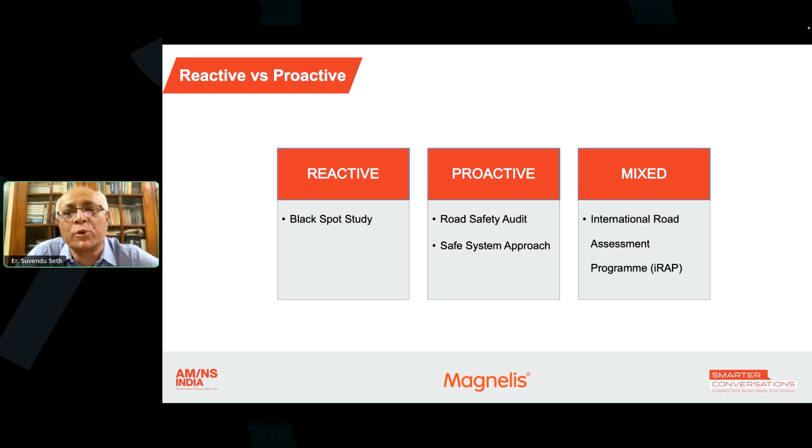What is a proactive approach? Proactive approach is the road safety audit, among these three, because black spot study is based on data collection, I'll go into details of it right now, and IRAP is a mixed approach. So the answer is road safety audit. These three I'm going to talk about right now.

The steps to crash analysis are: first identify where the crashes occur, then quantify the crashes, how many crashes occurred, what are the sources of the problem, why it occurred, evaluate the various improvements so that crashes can be reduced, obtain expert opinion on how to do the improvement, and then get funding to implement the safety measures. This is a very important step, because unless we implement the solutions, the situation will not improve. Even if we have done the study, we'll just keep the report on the shelf, nothing will happen on the ground. So this sixth step is very important.

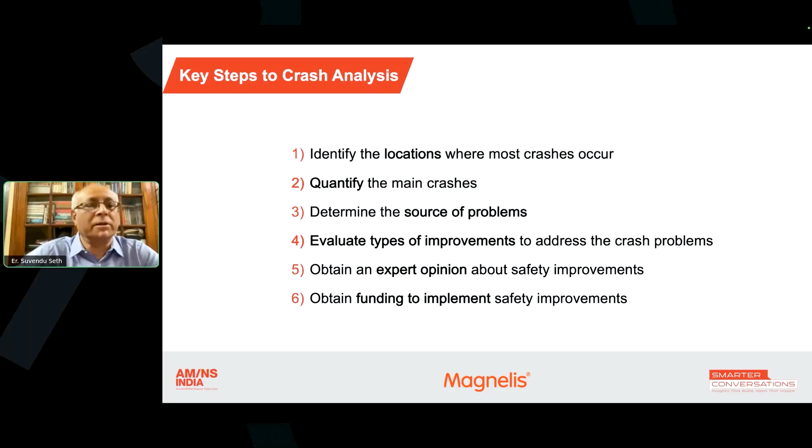This is one of the tools used by road engineers, the collision condition diagram. On the left side is a mid-block section where we've shown all the crashes, different terminologies like rear end crashes, left turn crashes and so on, shown pictorially where they occurred. The right side diagram is at a junction, showing what type of crashes occurred, side swipe or rear end and so on. We also mark the date and time, so that by looking at this figure, one can understand what exactly happened in that area, where the crashes happened, at what time, and what type. It gives a very good pictorial representation.

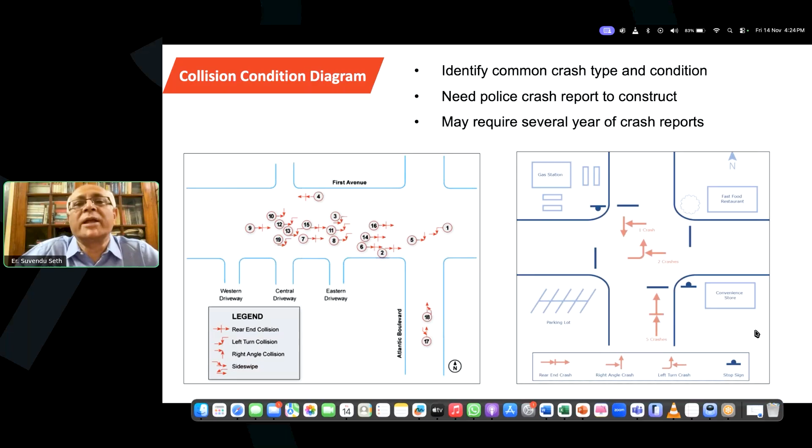Then we look at the causes of road crashes. The major causes are road users, vehicles, road conditions, roadway design, environmental factors, or any other causes.

Road user causes include excessive or rash driving, high speed, violation of traffic rules, fatigue, alcohol, or sleep. These are the major road user causes.

Vehicle causes could be failure of brakes, steering system, lighting system, and so on.

Road conditions we are also aware of: skidding roads or potholes, vehicles trying to avoid potholes and therefore having a crash with another vehicle.

Roadway design problems could be that the sight distance was not enough, or the curve was too sharp for that design speed, or traffic control devices were not proper, or there was no lighting provided. These are all the road design aspects.

Environmental factors include heavy rainfall causing poor visibility, or snow, mist, or smoke. This normally relates to visibility getting reduced and driving conditions becoming unsafe.

Other causes could be various factors. The two examples I've given here are improper location of advertisement boards, often seen on Indian roads. At an important junction, in a critical position, there's a big hoarding, so vehicles driving on the main road cannot see that some other vehicle is entering from the minor road until the last moment, and there could be a crash.

So this is some cause. Or it could be that the level crossing gate at the railway was coming down very slowly, and the vehicle entered the railway lines, and then there was a crash. So these are some other causes, but primarily it's roadway users, vehicles, conditions of road design, and environmental factors.

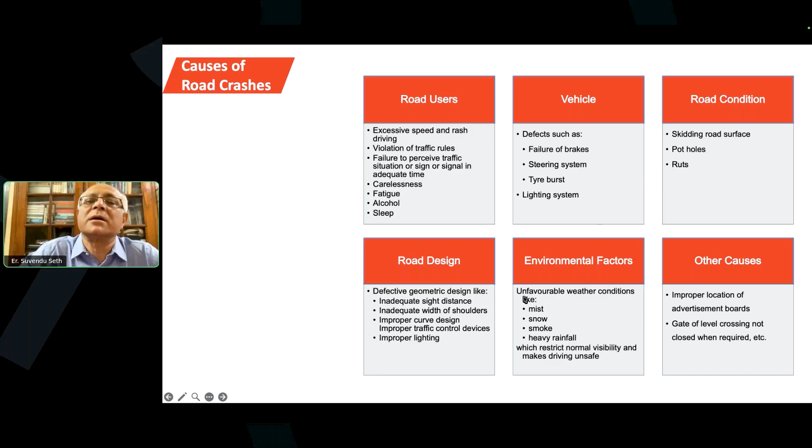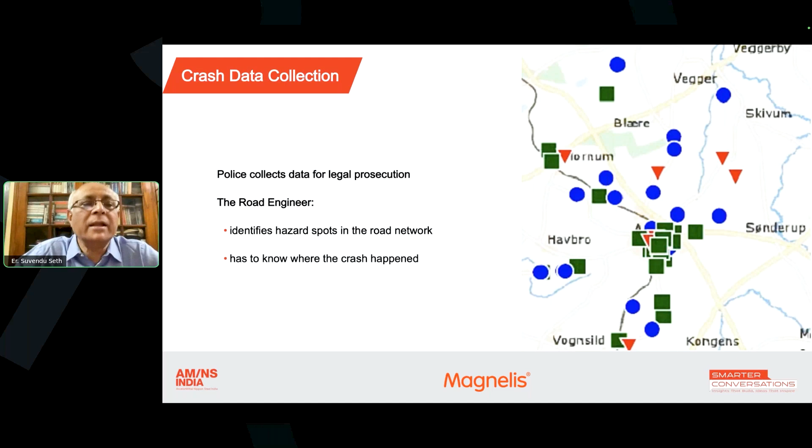So these are the major causes of crashes. Crash data collection: the first thing that a road engineer does is identify where the hazards are, which places the crashes are happening. This is usually from the police records. Police keeps the record of crashes, and the road engineer has to collect this and put it on the map to see these clusters, which areas are hazard locations, and then find out what exactly is happening, why the crashes are happening. So there...

There are various types of data that have to be collected. The very basic thing, the first is general data, like what time did it happen, which day did it happen. Time and date are important because a crash can happen in the evening or in the morning because of certain lighting conditions or certain environmental conditions.

So it is important to find out, when we are trying to investigate why a crash happened, what time it happened and then the date, because from date we can understand if it's a working day or a holiday. Then the nature of travel is different, so that can tell us why a crash happened.

There's some important information like the personal information of the driver - male or female, young or old. These can give an indication of driving nature. Classification of crashes: crashes can be either fatal, serious injury, minor injury, or it could be just plain simple property damage. So these are the first type of information that one collects.

Then the location. Location is very important - where exactly did it happen on the road, the exact chainage. Normally this has been our weak point, because the police records usually do not give an exact location. They give 50 meters from this particular landmark, or 70 meters from there. This doesn't exactly tell you where the location of the crash was. If we do not know it, investigation becomes very difficult.

Nowadays, with the present system of recording, where the police are doing it with handheld GPS, they're getting the exact location. Therefore it's much easier to plot it on the map and see exactly where the crash occurred, and we can get the cluster and do a better analysis. If we do not have a good idea of the location, the analysis is not right.

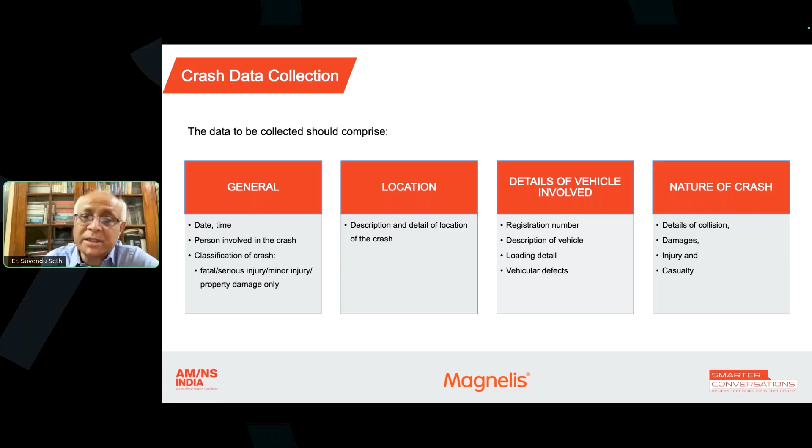Then we also need to have the vehicle involved - what registration number. This is more important for the police, but the type of vehicle is important, because whether it was a heavy vehicle versus a light vehicle versus a two-wheeler is important for engineering analysis, and whether it had any vehicle defects or not. Then the nature of crash - detail of the collision, what kind of damage happened, were people injured, how many casualties. These are all part of crash data collection and subsequent analysis.

Now we're coming to the black spot. A black spot is a spot where a number of crashes happen, a cluster of crashes. There are various ways of finding out which one is a black spot. In India, we follow the MORTH protocol, which was formulated under Supreme Court guidelines: any spot where 5 or more accidents happened in the last 3 years can be called a black spot, or any spot where 10 or more deaths happened in the last 3 years, or a combination of both. So this is defined, and that's how we look at identification of black spots.

Once we get the data, we look at the locations. By location, I don't mean just one spot - it could be one region, 500 meters this side or that side. That's how a spot is dealt with. And then we have to go and do the investigation of the black spot. To treat crash analysis, the process is like this.

First of all, decide the criteria of listing crash locations. This is our protocol in India for finding out how many crashes happened over the last 3 years at which spot, using the 5 and 10 rule: 10 deaths or 5 crashes. Then list all the crashes.

Then the team has to go out to do the investigation at the site, obtain all the relevant information from the police, go to the site, see what exactly is the situation there. Be a detective, find out what could be the possible cause of the crash, and then find out solutions, what could be the countermeasures to avoid this again.

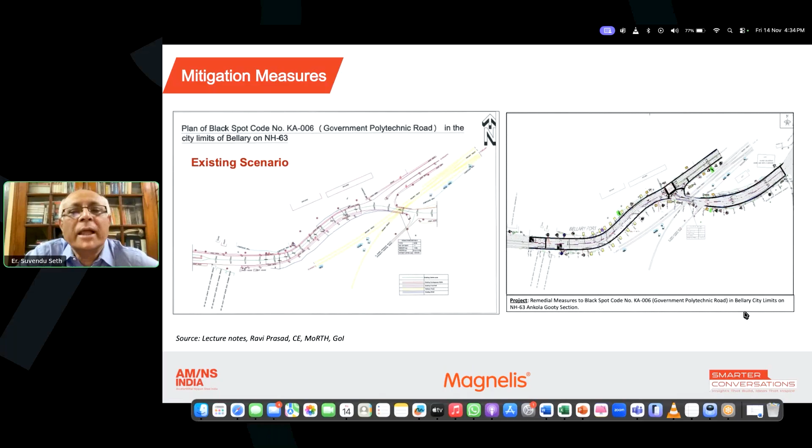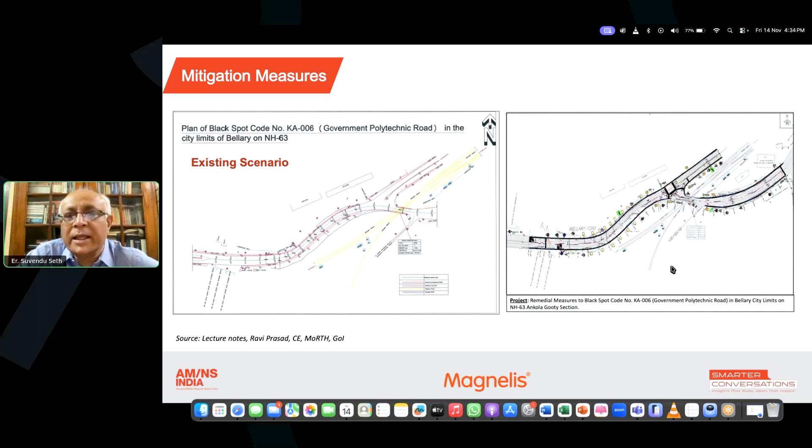But before that, let me talk about the mitigation measures and how to handle it after the crash investigation and analysis. On the left-hand side, this is an existing situation, a road with a Y junction, where several crashes occurred. So it was identified. On the right, you can see improvements made to this Y junction, and I'll go into much more detail here in the next slide.

See, this Y junction has been improved. There have been several signs put up for guiding the drivers, pedestrian crossings have been put up, islands have been created, and several types of markings and signs put up. This is to guide the traveling public better - by traveling public I mean all the road users: the people driving, two-wheelers, pedestrians, or cyclists, for everybody. So these are the signing, marking, and safety features put up to reduce the number of crashes at this junction, because there were a lot of crashes happening.

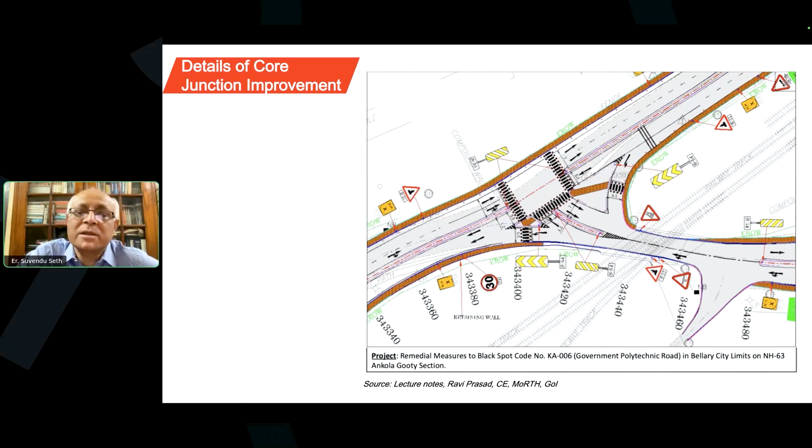Okay, so this is one example of junction improvement which comes out of black spot analysis, the one spot improvement. Well, here I have to talk about the relevance of crash barriers. Crash barriers are important because they can reduce crashes, especially when there's a high embankment right next to the side of the road, and if there is a narrow shoulder, vehicles can run off and fall down.

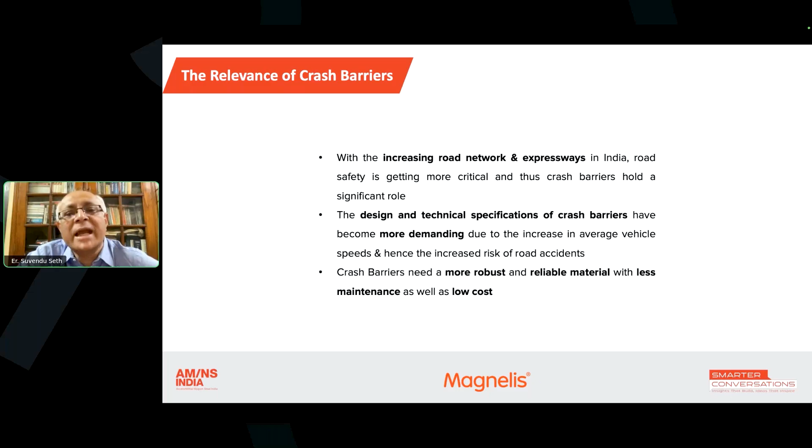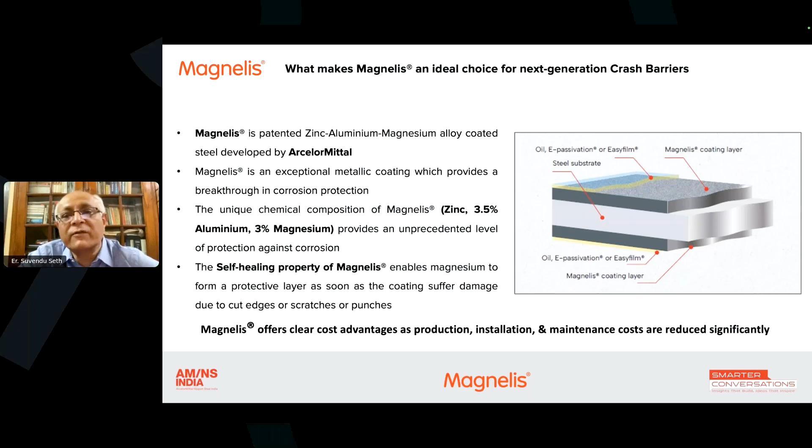Crash barriers can be of various types: rigid, flexible, or semi-flexible. Usually we use steel crash barriers, which can direct the vehicles back to the main road. There are several types of crash barriers, and various modern technologies are available in producing them. Magnelis is one such product which uses zinc, aluminum, and magnesium, giving better long-lasting life and reducing the cost of overall installation and maintenance. So this is one of the important products of crash barriers, an important safety product.

Going over to the next aspect, which is road safety audit. Now, as I said, road safety audit is a proactive method. It's a formal process.

It is not an ad hoc process. It's a formal process of auditing the road. It finds out the possible chances of accidents occurring and where they can occur. This road safety audit can be done for various stages of roads. It can be for operating roads where existing traffic is flowing, or for future roads which are under planning and implementation. It could be for traffic related projects or various road users.

Now, a very important point is road safety audit is an important input into the design, but it is not a part of the actual design. It focuses primarily on the physical elements of the road and tries to find out how to minimize the number of crashes from happening.

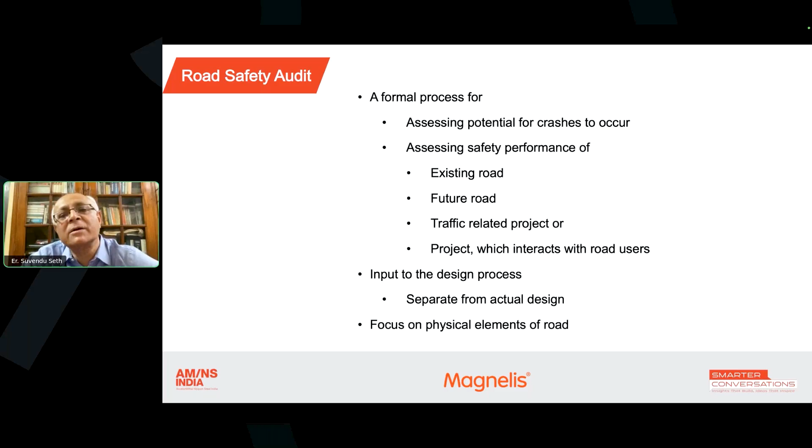So I'll go into more details of it. The aims of road safety audit are to minimize the risk of crashes happening, and even if crashes happen, the severity should be minimized. First we try to avoid the crashes, if not possible, at least minimize and reduce the severity. And this is for all road users, not just vehicles, for all kinds of road users. It also reduces the long-term cost of schemes, because if we can do it from the beginning, the later actions of crash investigation and modifications will be avoided, and it also improves awareness of safe design principles.

These are the aims of road safety audit. Briefly into the details of it.

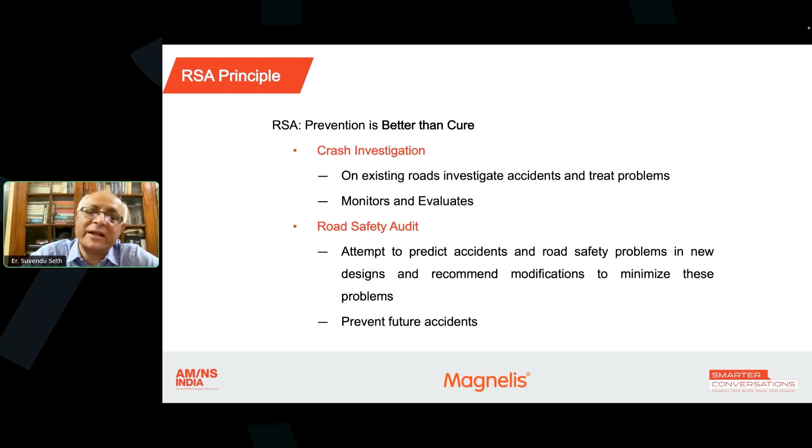The difference between crash investigation, which I talked about earlier, and road safety audit: the idea is prevention is better than cure. In crash investigation, we look at crashes that have already happened, try to find out why they happened, and find measures to prevent it. But in road safety audit, we are not doing that. We are looking at the road, traveling the road, and finding out what could be the possible flaws, trying to prevent accidents from happening at all. So that is the basic difference.

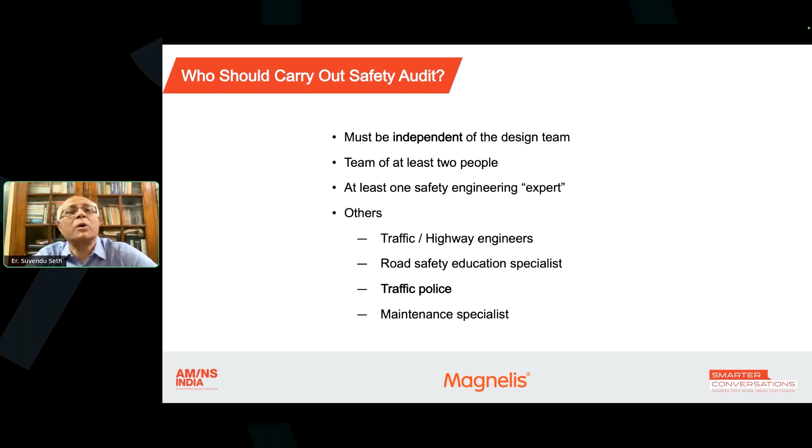So this is how the road safety audit gets done. It can be done for various stages, starting right from feasibility and all the way to existing roads. At the feasibility stage, we audit the proposals and road projects that are going to be coming up. Preliminary engineering, when we do the engineering, an audit can be done.

In the detail engineering stage, it can be done. Then during construction, at various stages, an audit can be done. And then just before opening the road to the public, a pre-opening stage audit can be done to see that the road is in proper shape to be opened to the public. Then after the road is in operation, as an existing road, audits can be done. Obviously the focus of audit will be different — at feasibility study it will differ from detail engineering study or the existing road stage.

So that is the detail of how to do audit. I'm not going into the detail of it, just giving an overall idea of what road safety audit is and how it gets done. Requirement of auditors: they have to have certain skills, at least 2 in a team, preferably 3 to 4 people as the audit team. The team leader should be skilled with sufficient experience and training. The team members assist the team leader, and carrying out site inspection is very, very important.

You cannot have an audit done without site inspection, both during the day and during the night, because any road can look safe in the day, but the situation changes completely at night. The result of the audit is a formal written report, which is submitted, identifying all the flaws with pictures and saying why it is a safety hazard. That's how the report is prepared.

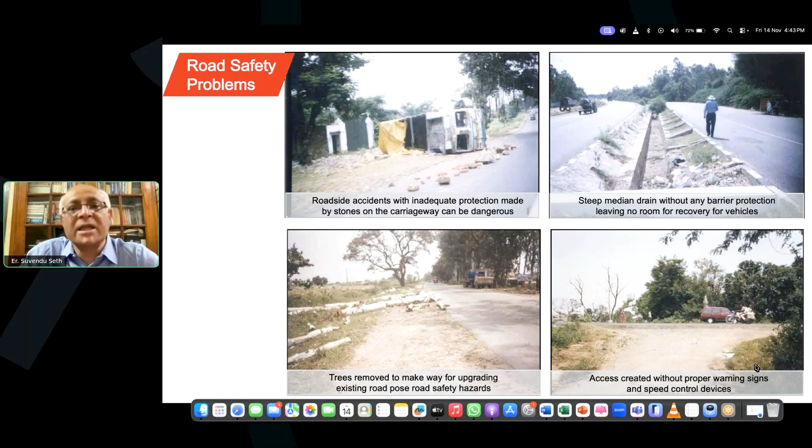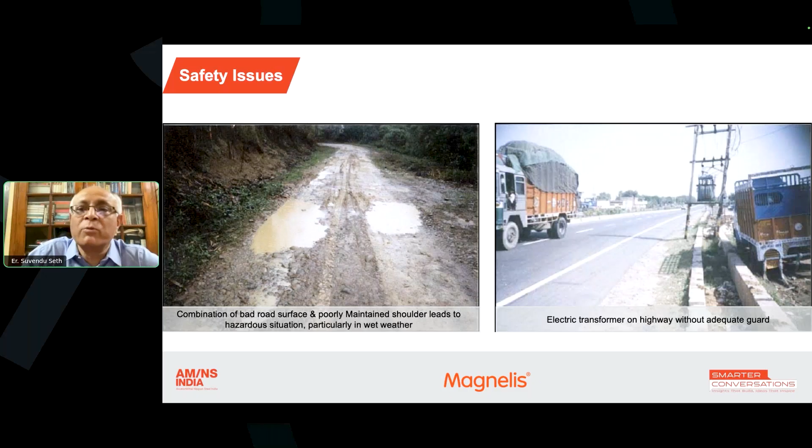On the right side, we have a picture of this transformer put right in the middle of the median. This is a hazard. Vehicles can come and hit the transformer, and there will be serious consequences - there could be fire, electric shocks, and several people may get injured. This should have been caught right at the beginning when the plans were being prepared, because transformers cannot be in the middle of the road. That is the necessity of having audits. These can be caught beforehand, because after that, if you want to remove this transformer, it will be a very expensive proposition. So I'll go into the safe system approach now.

Safe system approach is also not a reactive approach, it's a proactive approach. It is an effective way to address and mitigate risks inherent in a transportation system. We'll go into more of a systems approach here. It works by building and reinforcing multiple layers of protection. The whole idea is if you have multiple layers of protection, even if one fails, there will be another level of protection, so you will be safe. It's a very holistic and comprehensive approach to safety.

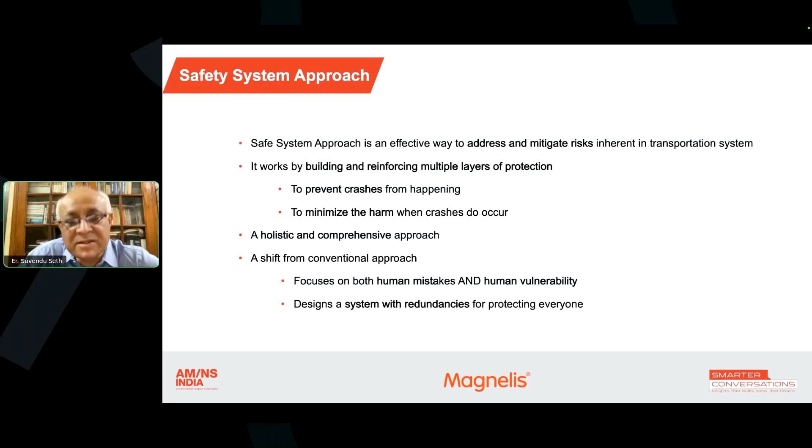The difference from the conventional approach is, as I said earlier, we look at human mistakes and human errors whenever crashes happen - what were the various human errors. But instead of human errors, in the safe system approach, we look at human vulnerability. We look at the vulnerability side instead of the error side. The design is done in such a way that there are redundancies - so if one thing fails, there's another thing to protect you. This is the overall approach of safe systems. It works at various levels.

The idea is to have 0 fatalities and 0 injuries in future. There are various aspects, that's why I said it's not only an engineering aspect. It looks at the infrastructure, which is related to engineering, but it also looks at human behavior, vehicle technology and engineering, emergency response. That's why the medical facilities come in. So there are various things put together in safe system approach.

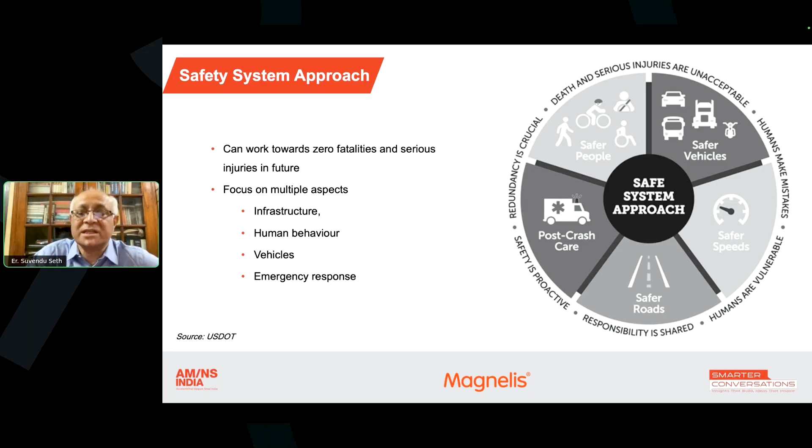The principles are that death and serious injuries are totally unacceptable. Even one death is too many. The idea is to have 0.

The next very important principle is humans will make mistakes. Everybody makes mistakes at some point in their life. Even the best drivers, who've been driving for years, can still at one point make a mistake. And it should not be that because of that mistake, the person will lose their life or lose their limb. So we have to accept that humans will make mistakes.

And then the important thing is humans are vulnerable. The human body can only tolerate so much. If there's an impact at certain high speed, the human body will not be able to tolerate it, and the human body will fail, resulting in death. So these will have to be accounted for while designing, and the design will have to be human-centric and accommodate human vulnerabilities.

Another important principle is responsibility is shared. It is not the responsibility of only the engineer, it is a responsibility of everybody: the government who provides this service, the industries who provide various components for safety, the non-profit or advocacy groups who propagate various safety measures and approaches, the researchers who bring out developments on how to improve, and the general public or users, who will have to be taught and will have to follow, so that the number of deaths and injuries are brought down to 0.

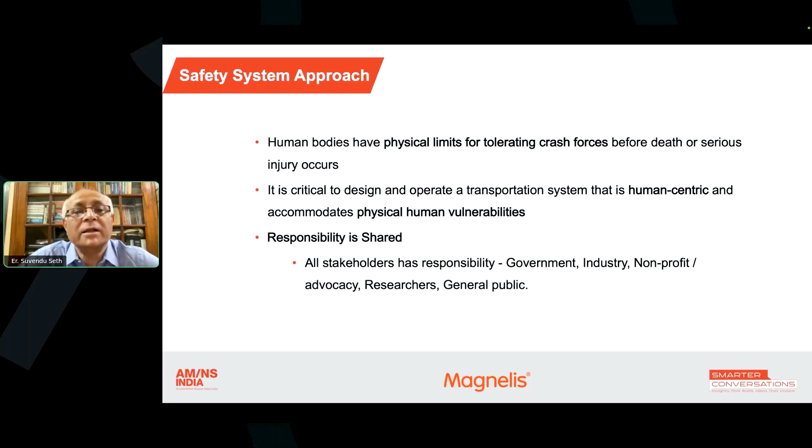So everybody is responsible, and safety is proactive. Here we are looking at a completely proactive tool. We are not waiting for the crashes to happen and then taking reaction. We are anticipating what kind of crashes can happen, and therefore we are taking measures, and we are building in redundancy so that if one thing fails, another thing kicks in.

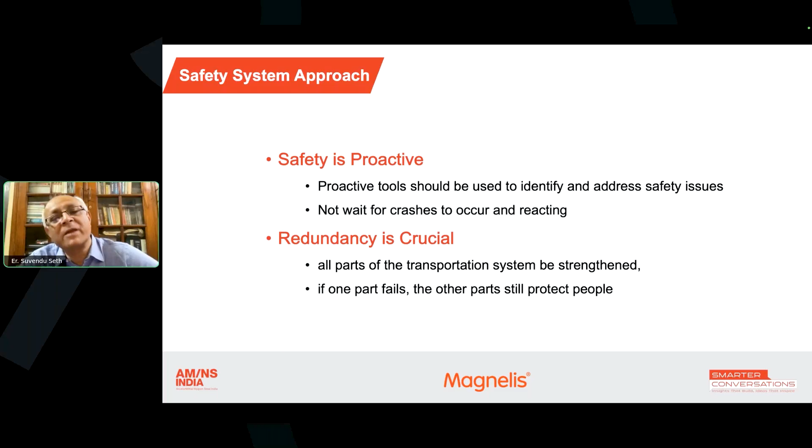So these are the approaches, and the various objectives are safe people, safe roads, post-crash care, safe speed, and safe vehicles. I'll go over each in slightly more detail.

For safe people, we're looking at encouraging safe and responsible driving behavior. These are where human factors and training come in. Another important point is to create conditions so that destinations can be reached safely, from the origin to the destination - the entire route has to be designed in a safe manner.

For safer roads, the environment should be safer so that even if human beings make a mistake, they do not end up being very seriously injured or dead. Injury tolerance should be brought into the safer road design, encourage safer behavior, and facilitate safe travel. This is also for the most vulnerable users - we have to look at the most vulnerable users first, because if something happens to a pedestrian, there's a very good possibility that pedestrian may not survive.

Going on to safer vehicles, these are about vehicle technology. There are multiple safety features available in vehicles today, and with time there will be even more, so that they can reduce the impact of crashes and save human lives.

Safer speed is about speed which is equitable and contextual depending on which road we are driving on. I'll talk about speeds more in detail a little later. Appropriate speed limits should be set depending on what type of facility we are driving at, and then targeted education, outreach campaigns and enforcement - all these are important to have safe speeds.

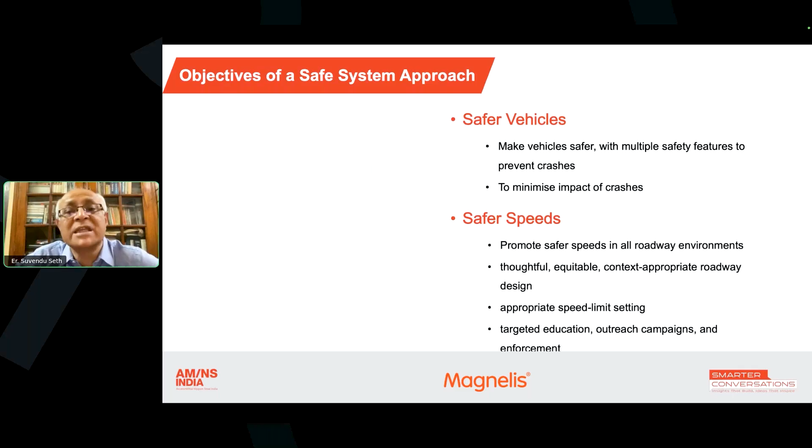Post-crash care is very, very important because we know of this golden hour, fast access to medical care. If we can reach the victim within a very short time, there's a very good probability that we can save the person. We have to have a network of first responders.

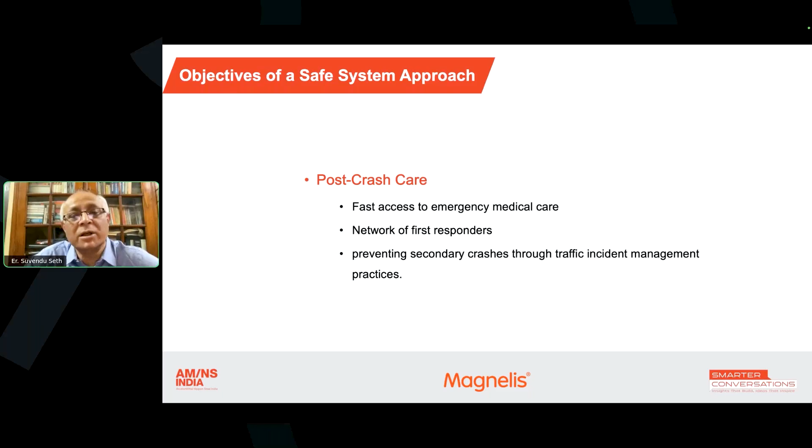Another important thing is that whenever a crash happens, usually there are secondary and tertiary crashes, because the vehicles coming behind do not know there's a crash, and they pile onto it. So these have to be prevented. Quick traffic control measures right after the crash are also important. So this is not only an engineering measure, these are emergency measures also from law enforcement.

Looking at the various differences, what are the differences between the conventional method and the safe system approach?

Usually whenever we look at crashes or accidents, we think the problem is the crash, the way one vehicle collided against the other. But in a safe system approach, we are not looking at the crashes, we're looking at the fatalities and serious injuries. Because the idea is not just to stop the crashes, but to stop the fatalities and injuries. Even if a crash happens, if there is no fatality, no injury, then it can be acceptable.

Then the cause of the problem. Usually we all look at speeding, drunk driving, people not following the rules, and so on. This is the conventional way of looking at the causes. But in safe system, we're looking at this: something happened in the system, something failed, that's why a crash happened, because there's a systems approach to the whole issue.

Responsibility, fixing the responsibility. We have seen in previous slides that human errors account for the maximum, more than 65% of how crashes happen. But in safe system, we are saying it's the system designers and operators. There was something that did not work properly, that's why a crash happened. It was not an individual's fault.

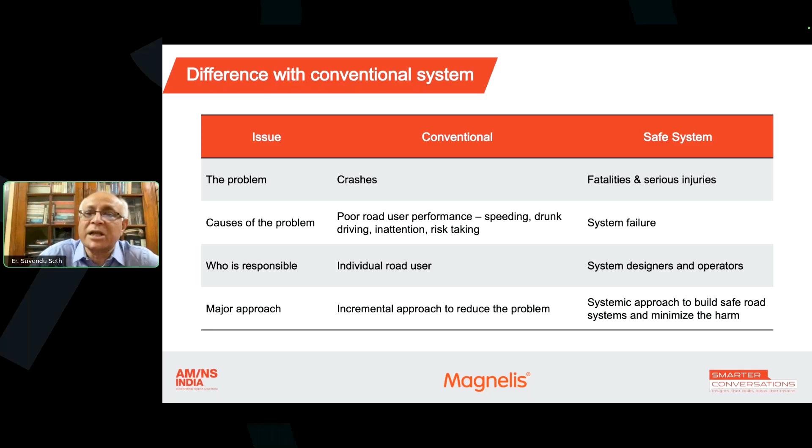The major difference in approaches: in conventional methods, we look at an incremental approach. We try to take measures so that the number of crashes can be brought down. In safe system approach, it is different. We're looking at a systemic approach to build a safe road system and minimize the harm so that the crashes and deaths are zero.

We're looking at some more differences. In the conventional system, the goal is to optimize the fatalities, so bring down the fatalities and serious injuries to have an optimal number. But safe system does not recognize this optimal number. Every accident is one too many. So we want to have no fatalities, no serious injuries, that's the goal.

The trade-off between the two: basically in conventional system, we think of mobility and safety as a balance. But in safe system, we are thinking of both together, maximizing safe mobility. Mobility should be in a safe manner, not a balance between the two.

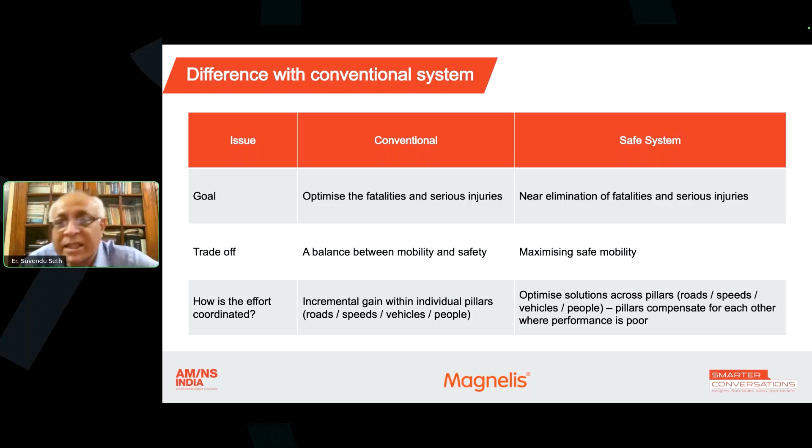And how is it to be coordinated? In the conventional way, we look at incremental gains with individual pillars. We could look at the roads, then speed restriction imposition, then enforcement, then vehicle technology, training the people. We're looking at various silos. But in safe system approach, all is together. Road, speed, vehicle - these are all the pillars, and everything put together is a safe system. So these are the basic differences between the conventional system and the safe system.

Then there are various countermeasures, such as proper lighting on the road, safe crosswalks, pedestrian crossings, bicycle lanes or separated bicycle facilities. At certain low speeds, bicycle lanes are all right, but for high speed facilities, we have separated bicycle areas so that the bicycles are safe. Then redundancy is critical - we have to have multiple things so that if one fails, the other kicks in.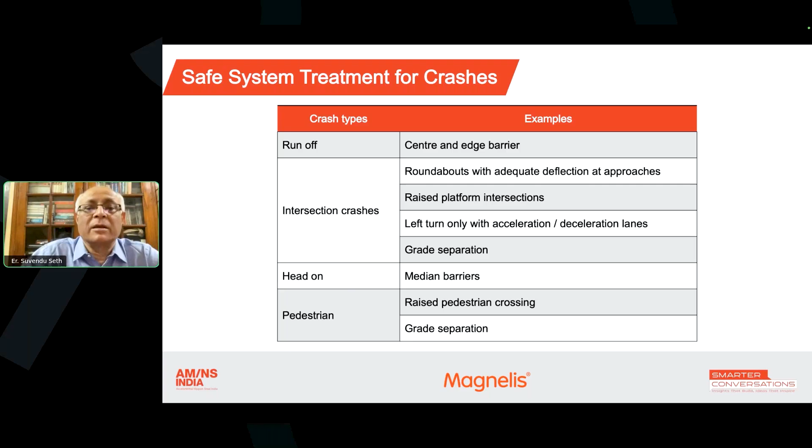For pedestrians, we can have pedestrian facilities like grade separated facilities or raised pedestrian crossing. Again, grade separated facilities are not very welcome by pedestrians. We know it from our various experiences all over India. People normally do not use these grade separated structures. People don't want to climb up the stairs, walk across, and then climb down. They would prefer to cross wherever it's convenient for them. So we have to be careful where we give the grade separation. Is it really justified? Will people use it? So it's much better to have at-grade crossing, which is easier for people, especially for elderly people. So we can provide grade separation when it is absolutely required.

Here is an example of a typical diagram versus safe system approach. On the left-hand side, for a divided carriageway, we have a wide median, and then two-lane roads in both directions. In the same right-of-way, we can have a four-lane road with a wide central median with marking and with sufficient pavement markers and several other measures. And then we can give side space so that we have offset for people to park if necessary, or for people to take rest, or run-out areas.

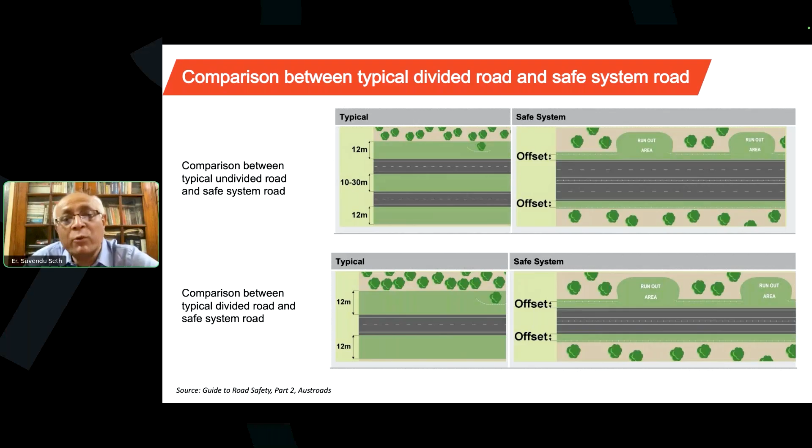For a typical two-lane highway with one movement in one direction, we can have offsets, we can have the central median markers, we can have a wide central median area with marking only. So these are the various safe system approaches that we can apply even within the right-of-way, without acquisition of land.

Safe speed is an important concept because we have to have the right speed in the right area for the place parameter. The speed should be equitable depending on the type of vehicle and type of area. It should be context specific, and people should be given targeted education about the speed, what is the right speed in the area, and enforcement is also required.

If you look at speed, why is speed so important? These three graphs show what kind of fatality can happen for different types of collisions: for pedestrians it's marked in red, side impact collisions between vehicles is in blue, and the yellow one is a head-on collision. We can see from the red graph that at 30 kilometers an hour, the probability of dying from a collision with another vehicle, a pedestrian or cyclist colliding with another vehicle, is about 10%. But the moment we go to 40 kilometers an hour speed, the probability jumps to 40%, and it goes on increasing. It jumps because the probability of death at high speed impact for a pedestrian or a bicyclist is very high. But for the other types of vehicle, the speed is much higher at which the probability of death is higher.

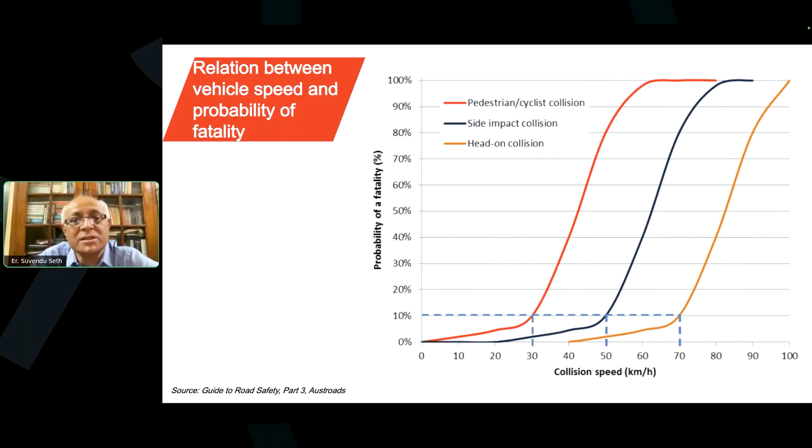So this is a guidance that can guide you to design what kind of facility can have what kind of speed limits and restrictions for a safe speed. How do we manage speed? There are various traffic calming methods. Engineering literature has it. The various ways of doing it can be speed limit, speed enforcement. Behavioral changes are very important, so that's why training is necessary. And nowadays vehicles also have speed limiter devices and adaptive cruise controls, which automatically restrict speed in certain areas.

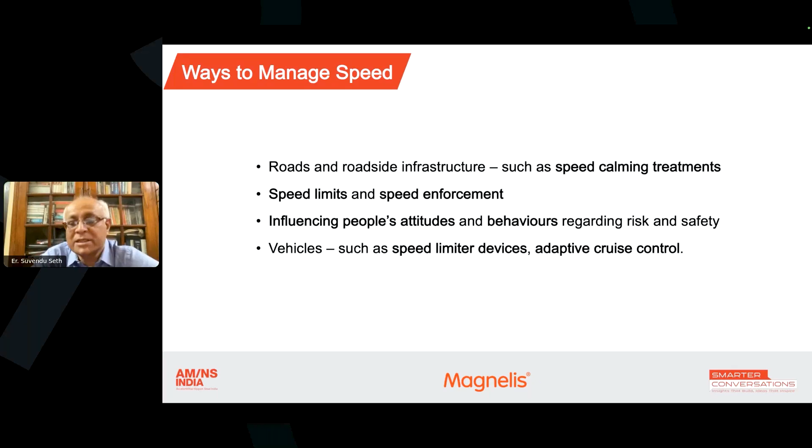So these are the speed management measures, and the design philosophy for various road users. For cars, the design philosophy is to establish appropriate speed limits because we know cars can cause crashes in certain areas, especially in busy areas. For urban design, reduce the carriageway width - if you reduce the width, speed automatically reduces. Limiting the visual length also helps - if you can see for a long distance, you tend to speed. Different road surfaces can be used, and various other traffic calming measures can be used.

Cyclists are much more vulnerable than cars. When designing for cyclists, design for cyclists as a priority - think of the cyclist as the main person. If it's a low speed environment, they can use the facility with other vehicles. But if it's a high speed facility, cyclist ways should be segregated, especially at busy streets. Even cyclist and pedestrian ways should be separated if there's heavy volume of cycling and vehicles and pedestrians. And the connectivity should be end to end, not just one small section, otherwise cyclists will not be encouraged to cycle. From start to end, there should be a safe facility.

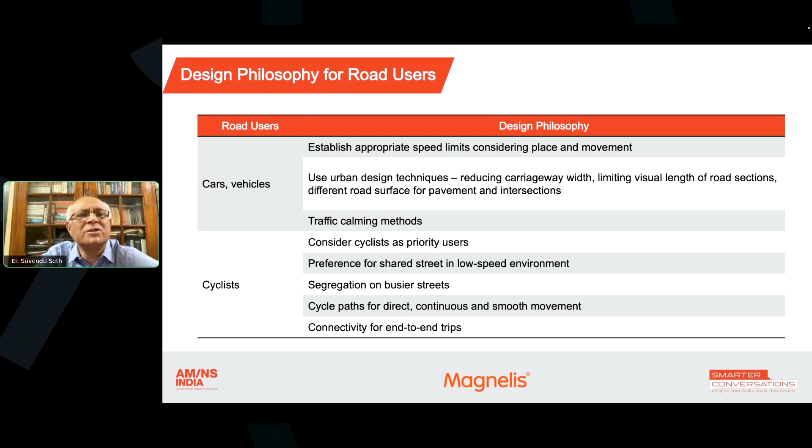That is the design philosophy for various road users. Coming to pedestrians, as I said earlier, pedestrians are the most vulnerable, so they should be given the topmost priority. Streets should be designed at the human scale, based on the needs of pedestrians. Activities should be encouraged, because when there are activities on the street side, people are encouraged to walk more. The street environment should be friendly to pedestrians, and the design speed right next to the pedestrian facility should be much less than 25 kilometers an hour, because at 30 kilometers or more, the probability of death increases if there's a collision.

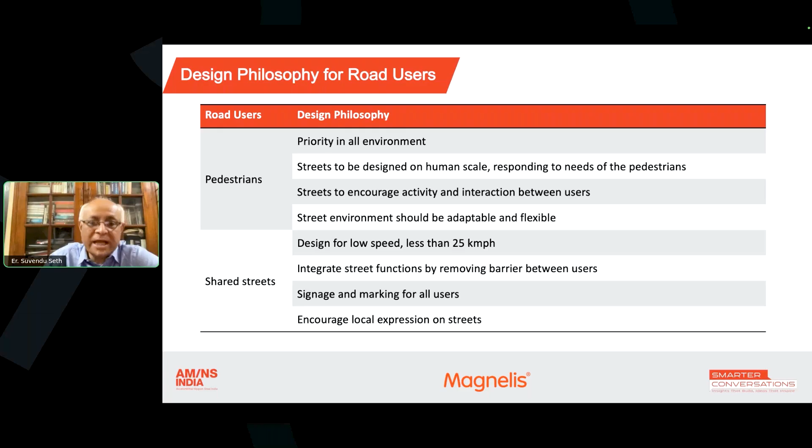Thus, street furniture and removal of barriers between people and users should be done. Normally we provide signage for vehicles on main roads, but we do not provide so much signage for cyclists, and signage for pedestrians is very rare - we don't provide it. But proper signage encourages proper usage of streets, so that should be encouraged. These are the design philosophies for various road users.

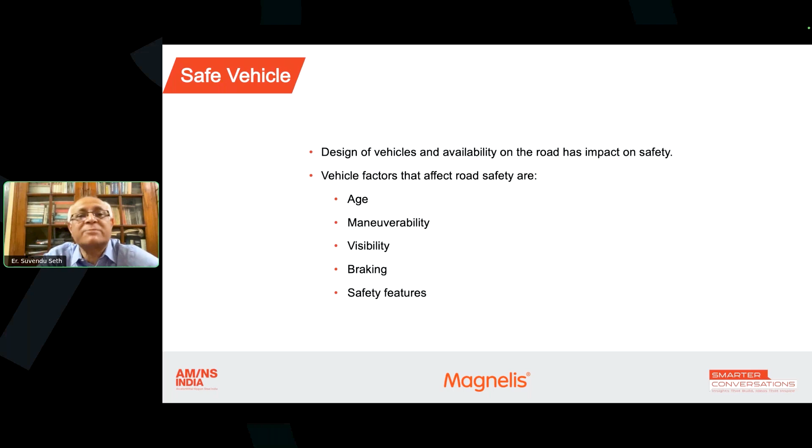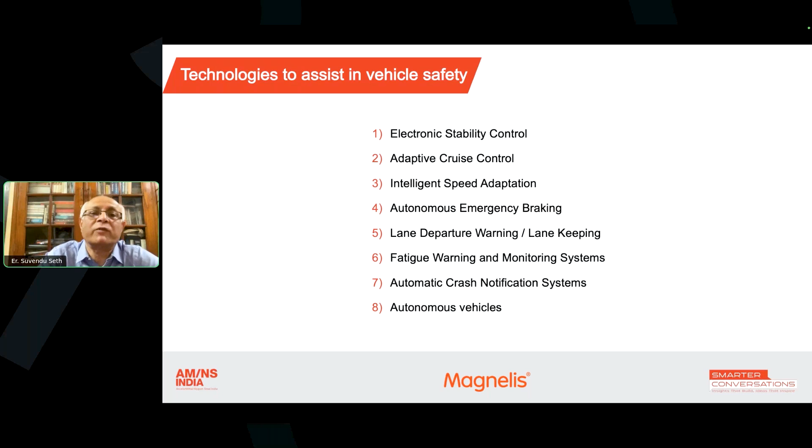For safe vehicles, we know this depends on the age of the vehicle, how well it maneuvers, visibility, braking, and various other safety features in modern vehicles. Newer vehicles have various safety features built in, which older vehicles did not have. That's the safe vehicle pillar of the safe systems approach. These are various technologies: stability control, fatigue warning - if you've had a drink and try to drive, the newest cars will warn you. Then there's automatic crash notification systems, and autonomous vehicles are coming to India very soon, so there'll be driverless cars also. These are all vehicle safety and vehicle technology aspects - also engineering, but more for vehicle engineering than civil or transportation engineering.

Then coming to safe people - how do you make facilities safer for people? As I was talking earlier about various aspects of the road: if there's a long tangent straight section, people will tend to accelerate and speed up, but if tangent sections are short, the speed will be less. If there are speed limiters, speed will go down. Openness of the situation - in wide, vast, open spaces people tend to speed up, while with narrow roads people try to slow down. We can have rough road surfaces so that people slow down, while smooth, nice road surfaces make people tend to speed. So these are the safe people approach, bringing safety into designs.

Behavioral aspects, as we know: no drinking and driving, child restraint systems which we normally do not use, helmets which we have started using with enforcement, and use of seat belts with enforcement especially for front seats, but even rear seats need seat belt use. There are speed zones, and encouragement of safe driving through education. These are all the human behavioral aspects to safety.

Then emergency aspects - as I said earlier, we have to reach emergency facilities to injured people very quickly on the scene in a timely fashion. For that, we have to have trauma centers spread out all over, especially near major highways. Then post-care facilities, post-trauma care facilities. And very important is performance measurement of emergency response - we must have a proper performance measure to see whether our emergency response system is working properly or not.

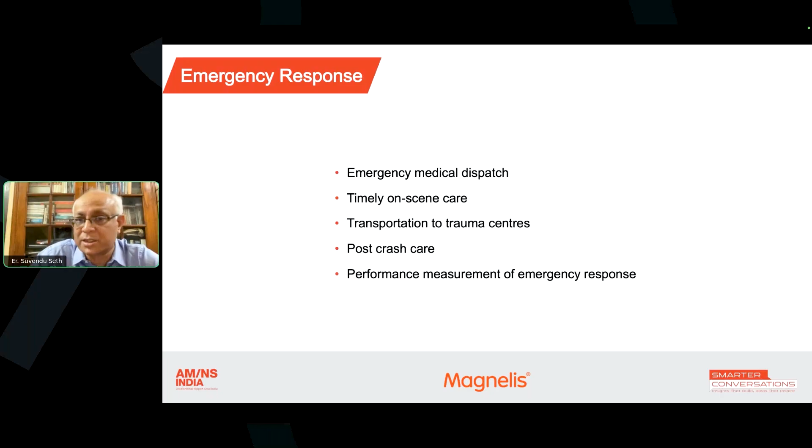Vision Zero is an extension of the safe system approach. It was developed first in Sweden in the 1990s, and it moved to other parts of Europe and then North America, and now it's all over the world.

Just like the safe system approach, Vision Zero thinks of preventing all deaths and injuries, unlike the traditional way of looking at accidents, where accidents are considered inevitable. If people are driving, there are bound to be some collisions, some accidents. But Vision Zero does not accept that. It wants to bring all deaths and injuries to zero, and that is a major departure from the traditional approach.

Vision Zero is a multidisciplinary approach, just like the safe system approach, and recognizes that people will make mistakes, and redundancy is built in, just like the safe system approach. Vision Zero is not a slogan, not even a program. It is fundamentally a different way of approaching traffic safety, about safe mobility, not just about mobility and not just about safety. It's about safe mobility.

All the people, all things are brought together, building sustainable leadership, collaboration, and accountability. Data analysis is necessary, but we should not neglect the proactive ways of collecting data and analysis. That is important. Equity and community engagement should be given priority, along with speed management and setting a timeline for zero deaths and serious injuries. That is the strategy for Vision Zero. Thank you.